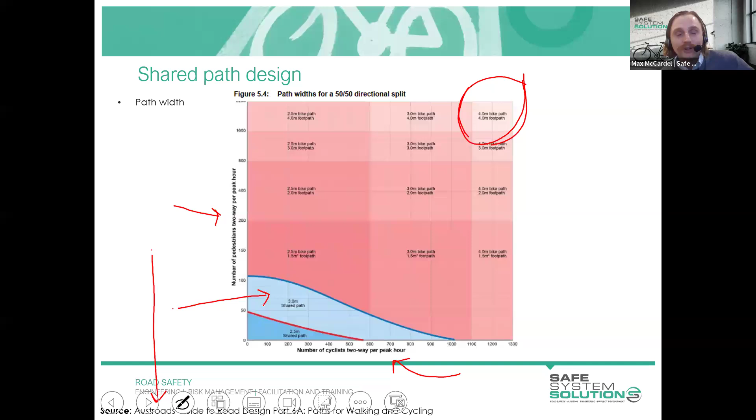Instead, let's aim for two separate facilities and go with that approach instead. You can see the really common 3-meter wide shared path — it's really only appropriate when you've got relatively low volumes of pedestrians per peak hour, so around 100 or so and less. But anything more than that, you get an uncomfortable environment and pedestrians may not feel safe, or it may not be comfortable to walk through there or ride through there.

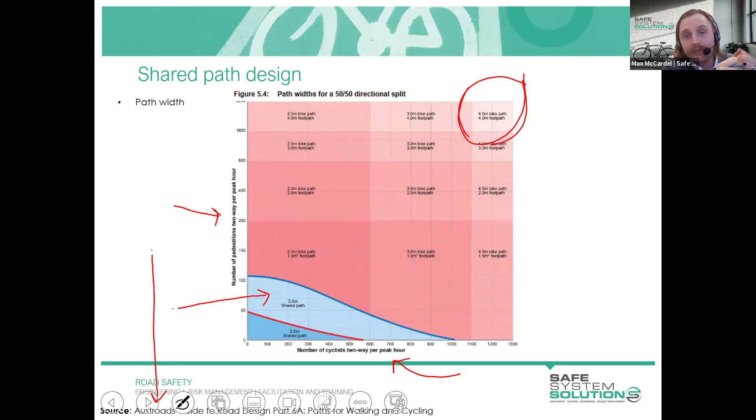Another way that we can gauge what width we should be adopting for a shared path. The previous one was based on if we know anticipated pedestrian and cyclist volumes, or we can forecast or estimate it. However, that data is usually very rare to have, particularly if you're working in a greenfield site. If it's a new development, you may be uncertain exactly how many pedestrians and bike riders would be using these facilities. You can do calculations and estimate those things, trying to plan for the future. But it's also quite common to refer to these tables, which split your shared paths into three types of classifications.

One is called a local access path, shown on the left-hand side here. The way I think of this, similar to all of these, is like your road use hierarchy. A local access path is similar to a local street. You're not expecting lots of pedestrians or bike riders. It's not going to be a high strategic function for bike riding through there, but it might connect to local residents and local streets. In these scenarios where you have that lower strategic function, you could look to adopt a desirable minimum width of around 2.5 meters. You can see a minimum width of 2 meters is nominated there, but with the caveat that it's a very narrow space. In this diagram, that's about 2 meters wide.

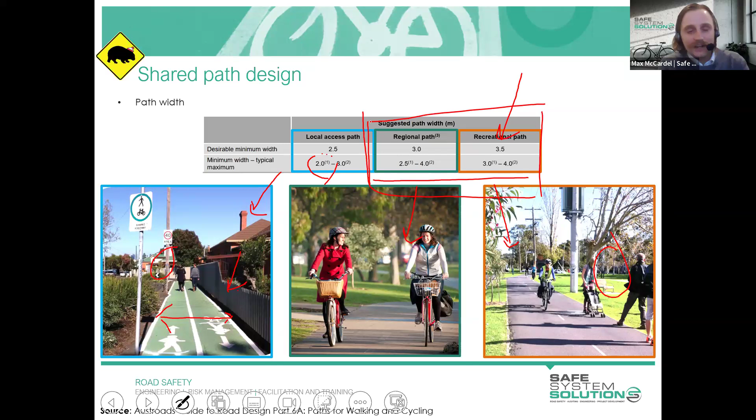The differentiating factor to the recreational path is there could also be adjacent land use associated with the path you're looking at - for instance, playgrounds, schools, or activity hubs adjacent to the actual path, where people may be more inclined to stop and spend more time there. So you'd have an even higher influx and there could be lots of crossing points. But generally, those two, regional and recreational path, are not incredibly well defined, and there's a bit of cloudiness around which you would apply depending on what your network looks like or what your aspiration is.

As a rule of thumb, though, that 3 meter wide shared path is a pretty common standard to have. 3.5 meters is for areas where you've got much more activity that is expected.

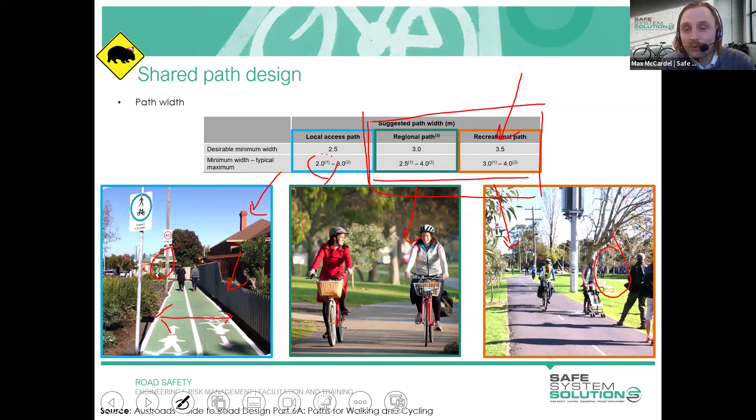Okay, I'll have a chat now about our gradients for shared paths. So gradient is just the slope of the shared path, how steep it is.

But anything more than that, what you're actually going to do is you're probably going to get riders not using that or looking for alternative routes, because it's unrealistic to expect them to be able to ride such a steep incline for so long. Of course, there's some riders out there that actively seek out these steep ascents, and they'd be very excited to see 10% or 15% gradients.

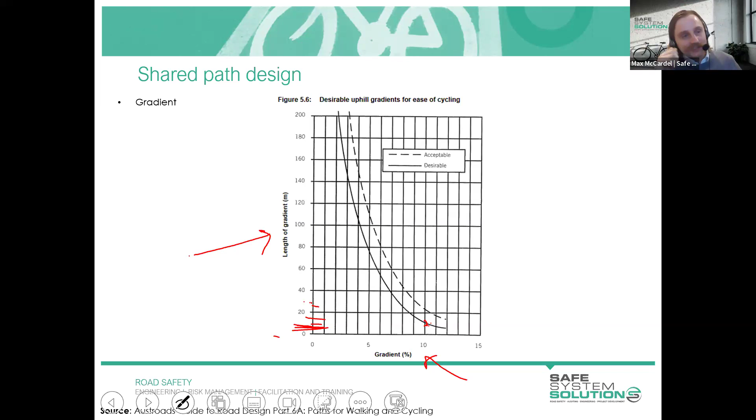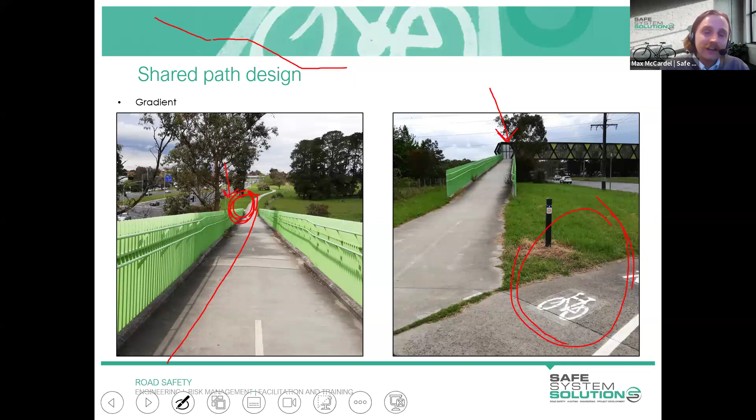So as part of this audit, there was a recommendation to move this path connection to where it is a bit more visible. It's not only more visible, but by the time you actually get to that point, you would have washed off a lot of speed because it starts to go back uphill again. That one has actually been installed since this audit was completed, which is pretty exciting.

But that's just an example of where you should be thinking about the uphill ramifications, how steep the hill or gradient of the path is, but also for users going down, what are the implications of potentially fast speeds going down your shared paths.

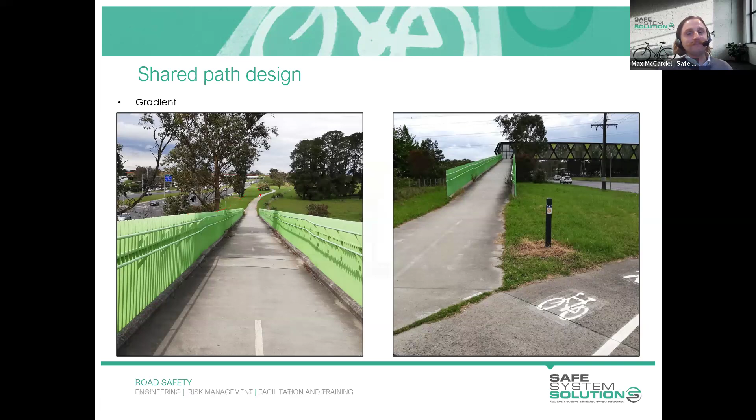For those not familiar with operating width, it's basically how much space we suggest for a typical bike rider. Now, we do have bike riders and cycling facilities with bicycles that are much bigger or wider. They could be lower to the ground, like recumbent bicycles, or tricycles with two wheels on the back that are much wider. So this is very much an average, and it's not going to say that every single bike will fit this.

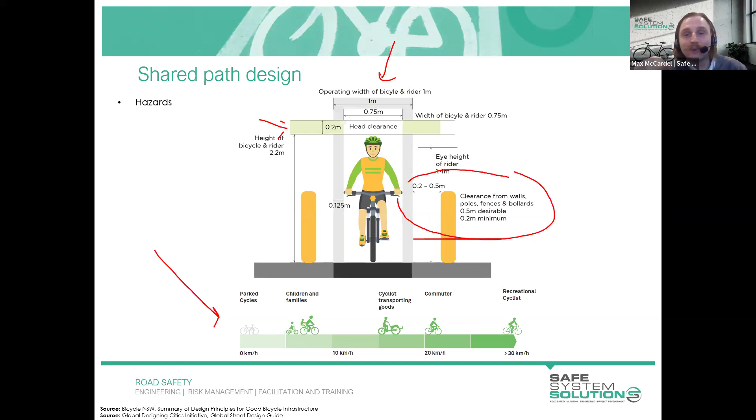I also wanted to note that this operating width of 1 meter is basically based on the idea of a nice flat passage. If you've got a shared path that's uphill, it's actually very common for riders to wobble their bike, moving the handlebars left and right to pick up or maintain speed. In those scenarios, if you've got an uphill shared path, it might be worth making it even wider to account for that kind of movement, rather than narrowing the space down too much.

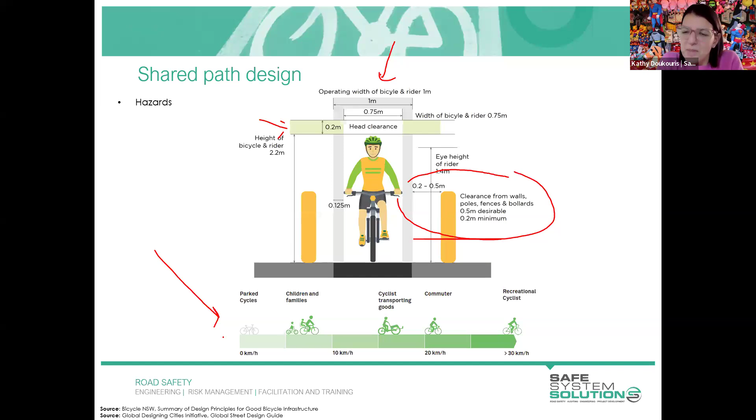Kathy: Thank you, Max, that's some very interesting information there. Oops, sorry about that. We've had a question come through based on the head clearance here: should the clearance under structures be 2.4 meters, and should this apply to developments as well?

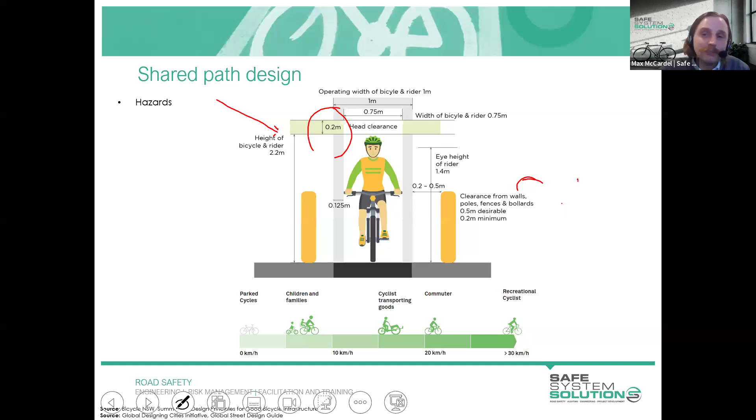So this one is out of Bicycle New South Wales, that's what they've currently got as their guideline. However, there are other jurisdictions that opt for a 0.5 meter head clearance instead, which would bring it to 2.7 meters. So it would depend on which jurisdiction you're dialing in from, but it would certainly be pertinent to reflect on your own supplements and standards about what that head clearance looks like. But yes, based on this one, you'd take 2.4.

And the rider height of 2.2 meters, what is that based on? Good question. So the eye height of the rider is where a lot of the calculation comes from. And that is once again assuming a standard or an average bike height, so where the saddle is, and then applying what would be an average height for a human being, and then kind of working it out from there. So it's by no means representative of the diversity of bike riders that we have. It is an average, but just like with any other operating widths that we have, so we've got operating widths for passenger vehicles, operating widths for heavy vehicles, their exact widths also differ, but we also just tend to adopt a standard or a notional kind of width or height in this instance.

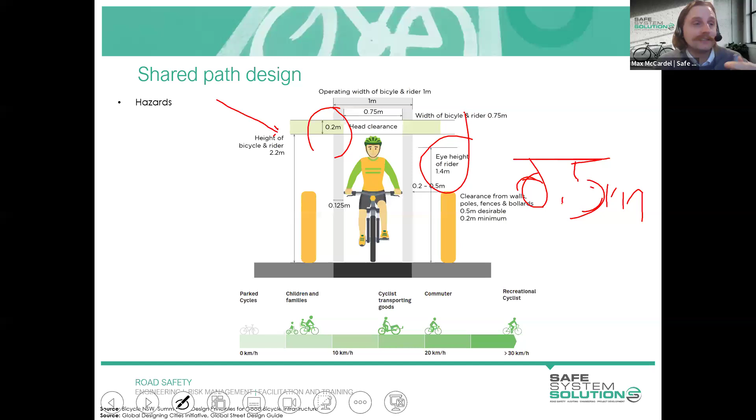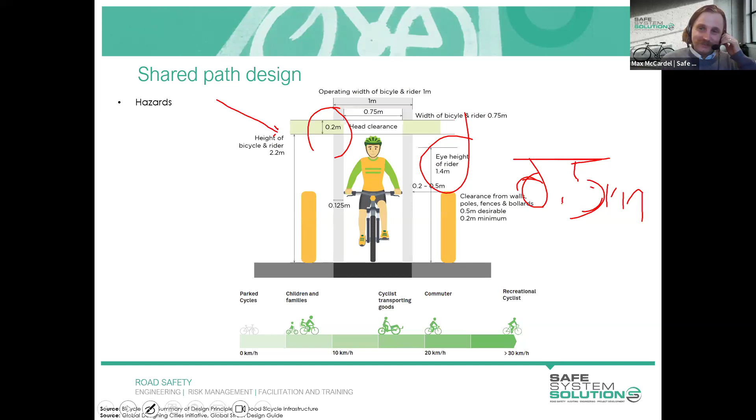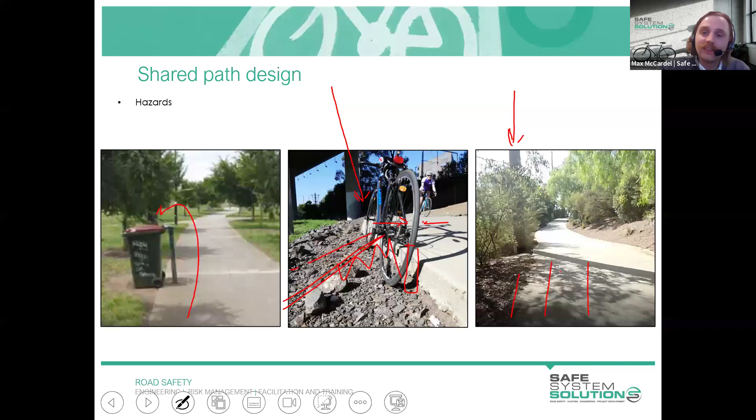Another common hazard that we do have is utility poles very, very close to the edge of the shared path. You might remember in the previous slide, I was talking about the rule of thumb, which is keep all hazards half a meter away from the operating width of the bike rider. When you get into these scenarios, it can be a bit subjective as to where the operating width of the bike rider in particular actually is. Like, is it over here? Or is it over there? How do you actually define that?

And the other rule of thumb that I'll give to you is you take the edge of the shared path as the edge of the operating width for your bike rider. Makes it a lot easier, because now if you've got any fixed hazard which is within half a meter of the edge of your shared path, you could classify that as a hazard and something that should be looked at to mitigate that risk.

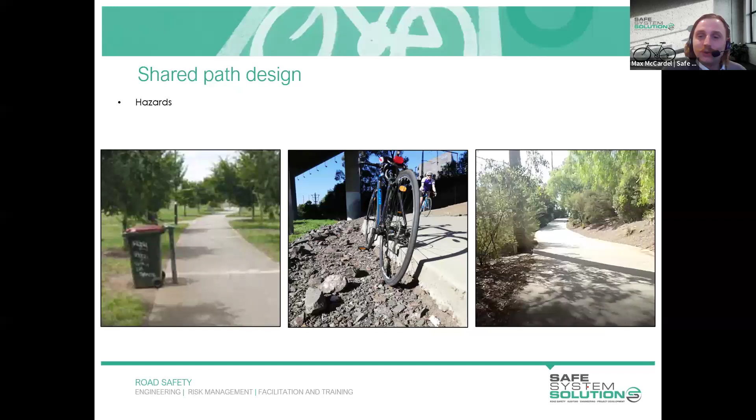Some potential solutions here. In a perfect world, you'd just absolutely remove the hazard altogether. You would hopefully relocate the pole so that it's outside of that half-meter clearance, or you would make an underground asset so you don't have a pole altogether, but appreciate you don't always have the luxury of that. Other things that you could do, you could shift the path out a bit and build it up on that side to maintain the width.

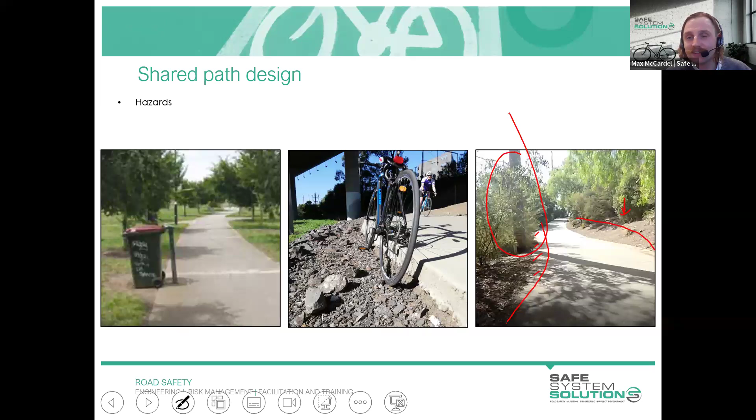Or if you're unable to maintain the width on that side, you could still narrow the path and use some pavement marking or something like that just to try and get riders away from the edge of the path there to reduce that as a risk. I think in this scenario, because you've got vegetation that blocks the sight to that hazard, and there's a bit of a curve there as well, all of those things increase the risk of riders clipping their handlebars on that. So even trimming the vegetation would help to reduce that as a risk.

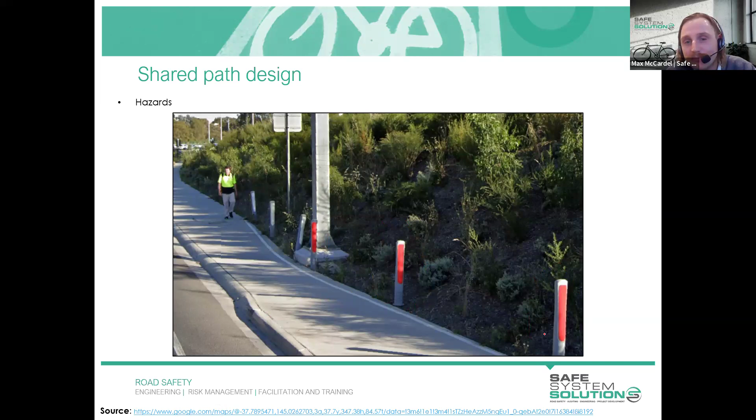Once again, it's that same idea where it's much, much better to remove the hazard altogether than try and highlight the hazard. But it's important to be pragmatic about these types of things. It is unfortunate that this was only constructed a few years ago, and this kind of detail wasn't picked up in a road safety audit or things like that. It certainly wouldn't have been impossible to have constructed this into the embankment and just construct some retaining walls to house that gantry system and then maintain the shared path width. So by all means, if you're doing things at a design stage, it's a lot easier to try and rectify those risks then through design solutions, as opposed to try and mitigate it through things like signs or lines or hazard markers, stuff like that.

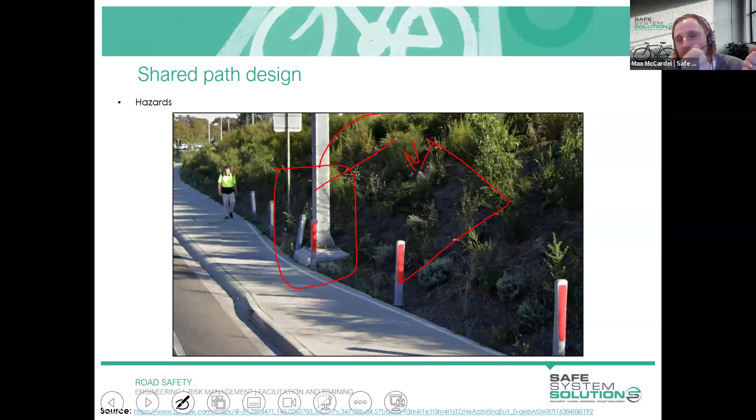All right, so wanted to have a quick chat about our sightline calculations, and appreciate not everyone here would be involved in completing these sightline checks. But I just wanted to make a note that there are sightline calculations specifically for bike riders. It's not a dissimilar equation to stopping sight distance or safe intersection sight distance. It's really not that different. There's just a few different ways that the coefficient is calculated and things like that, but generally very, very similar in principle.

So what we're looking at here is we've got sightline requirements for both the horizontal nature of a curve. So basically, if you were riding around a bend, can you see what's on the other side of that bend? Or is there going to be things blocking your vision? And to be able to calculate, well, what is the required stopping sight distance? That is, how far as a bike rider do I need to be able to see in order to, if there is a hazard on the shared path, stop before colliding with that hazard. So we need to have a think about, well, what's the likely speed that's going through there? What's the friction coefficient? It will depend obviously on the pavement conditions, so if you're on a gravel track, that would differ to if you're on a nice concrete path. It'll also make a difference what direction of travel you are if there is a grade, so if you're going downhill or uphill, that will make a difference as well.

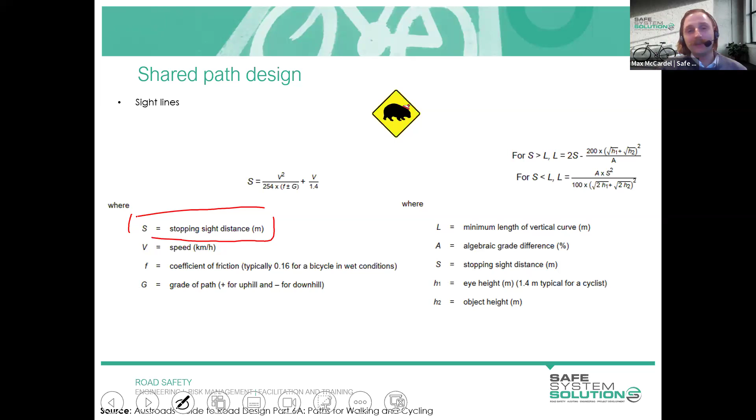The other time that we will do a sightline check will be for vertical geometry, so that's where you've got like a crest in the shared path. And it's a similar idea where we want to make sure that we've got enough sight over that crest so that if there is a hazard on the shared path, I'm not going to just ride straight into it and have no idea. I've got the ability to stop. So that's where that second equation comes in.

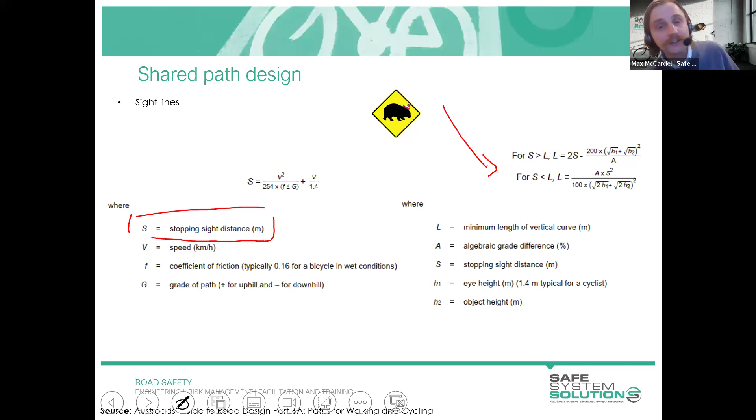The good news is neither of these kind of quite technical calculations will feature in your quiz, so you don't need to get too hung up if it's been a while since you've done any calculations, but just wanted to make a reference for those that are involved in technical design that there are specific calculations for cycling sightlines.

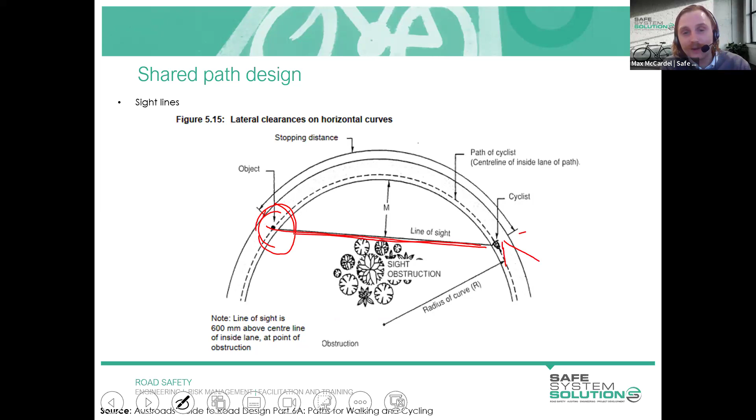So that's what the calculation is used for. Thought I'd give you an example of one of these, where I've actually used this equation. So this is another audit that I completed of a shared path.

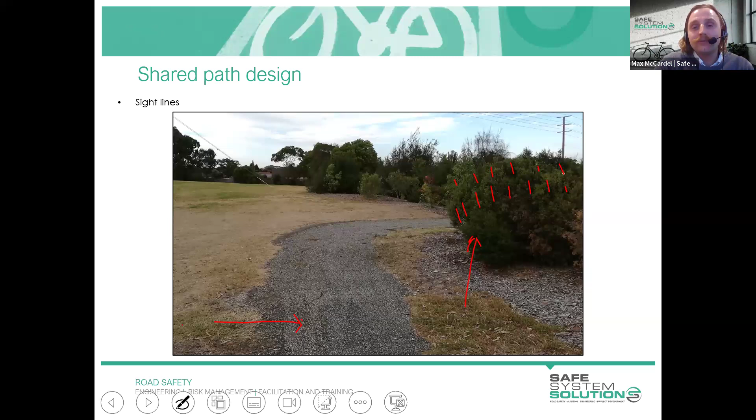Of course, if you were doing something during a design review, you'd be saying, is there a type of plant we can install here that is by nature low growing? So it's not going to get that big and we don't need to worry about that maintenance.

So just an example of how that is actually applied in the real world.

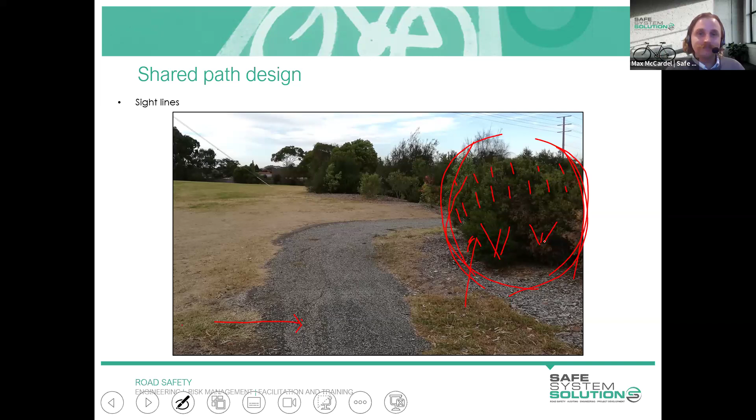I'll move on now to fencing, because there's generally a bit of apprehension around applying fences for shared paths, or a struggle to understand exactly when and where not to install fences. Because if they're installed too close to a shared path and they're not adequately protected, they are a hazard. So it's important to get these things right. And the Austroads Guide does have some pretty good guidance on when we should be installing these things.

I'll do a shout out to Queensland as well, TMR. They have got a quite detailed report or guidelines document that goes into much more detail than this about what type of fence is required and what the fence should look like. So if you're working in Queensland, good news for you - you can definitely reference that.

But this is certainly what most of us would be looking at. So what we're looking at is there's two scenarios where we could be providing a fence. In the left-hand example, we've got a vertical drop, where there's just a sheer face at the edge of the path. Or we might be putting a fence where we've got a steep embankment.

I'll focus on the left-hand side first and chat through the vertical drop. The first note is a fence is not required where X, and X is the distance from the edge of the shared path to where the drop is. If X is less than 2 and Y is less than 250 mil, we're saying a fence is not required, with the caveat that we should be battering off the surface.

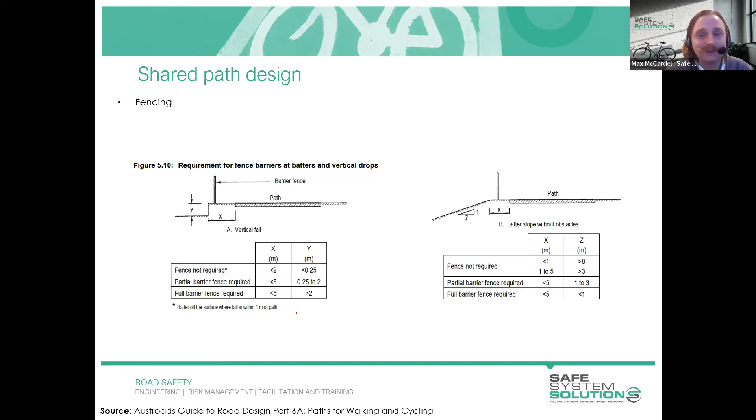So that's the first description there. Then we get into these two tiers of fencing, and I kind of wonder if this was the best approach because it overcomplicates the fencing process. But anyway, I'll chat you through it so you can understand it, and I'll let you make up your own mind as to if this is the best way to go about things.

There's this idea of a partial barrier fence, which you could call the silver standard, and then a full barrier fence, which is the gold standard. It's saying if you've got a drop off that's between 250 mil and 2 meters - and a 2 meter drop off is massive - then partial barrier fence, let's pop that one in. And if it's greater than 2 meters, you should be doing a full barrier fence.

I'll show you exactly what those two different fence types look like in a moment. But it's just got those clear definitions of when you would do either a partial or a full.

It's a similar approach for our embankment. We don't require a fence where we've got quite flat embankments. That is kind of self-explanatory - fence not required. And the way that you read it is it's the relationship of 1 to Z, or rise over run, 1 to Z.

And if it's between 1 to 5 away, like hinge points, and Z is greater than 3, it's relatively flat, then we don't need a fence. But if it's less than 1, then it has to be even flatter than 8.

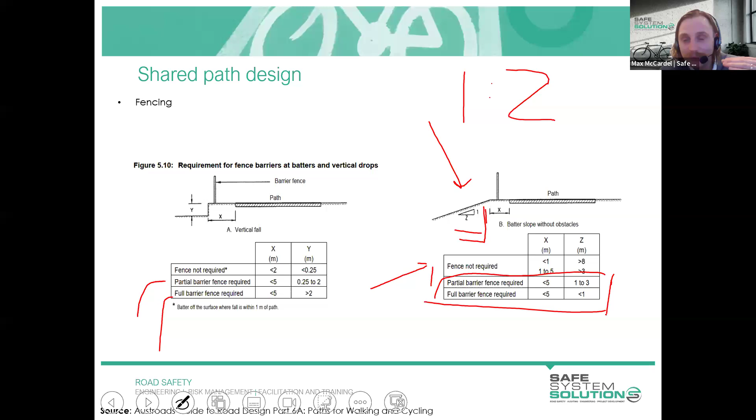Don't get too caught up if that's a bit too technical, but it's just that idea of basically what does that slope look like? Is it like a 45-degree or is it like a 10%? You can then do a similar kind of calculation to determine, well, I know what my 1 to Z is. I know what type of embankment we've got or will be constructing. And I know that I'm going to have to install a partial barrier fence or a full barrier fence. So very similar, you just got to work out which kind of tier it fits into.

Teaching this course a few months ago, I learned of a participant who said their toddler fell through the gaps of one of these things while riding through the partial barrier fence. So I would tend to be more conservative and look at designs that advocate for full barrier fences, because it's not a negligible cost difference, but there's not a lot of cost saving or benefit in always going for a partial, where you still have a risk of those lower to the ground, smaller people, or hazards falling through. Anyway, just wanted to share that.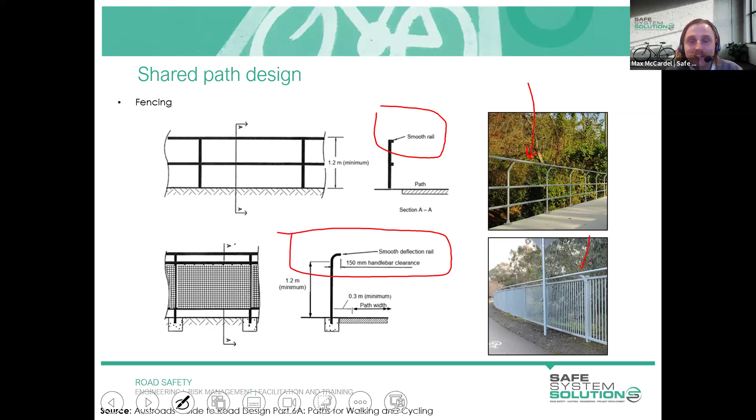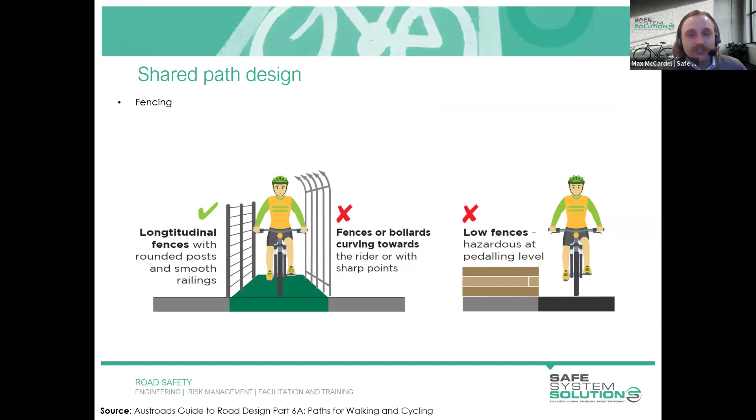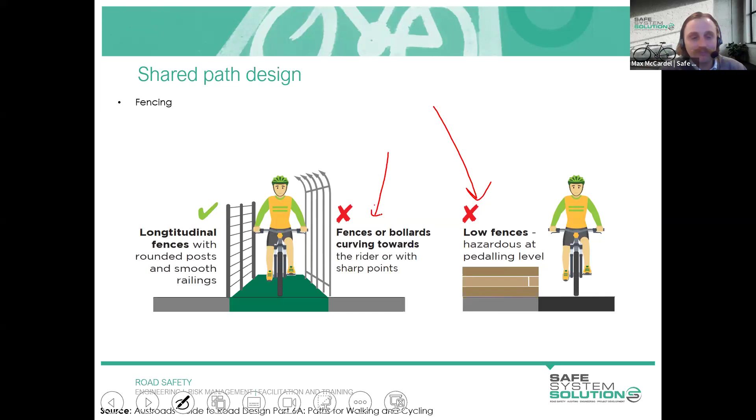Another thing just on the fencing I wanted to mention, low fences. So if you've got planter boxes or anything like that, they can also count as a risk, particularly for pedaling strikes. Anything above 200 mil is where you might encounter that pedaling strike. So have a think about if you've got any scenarios like that. We also want to make sure that whatever fence we're using doesn't curve towards or have any sharp points or vertical members that could potentially snag the bicycle rider.

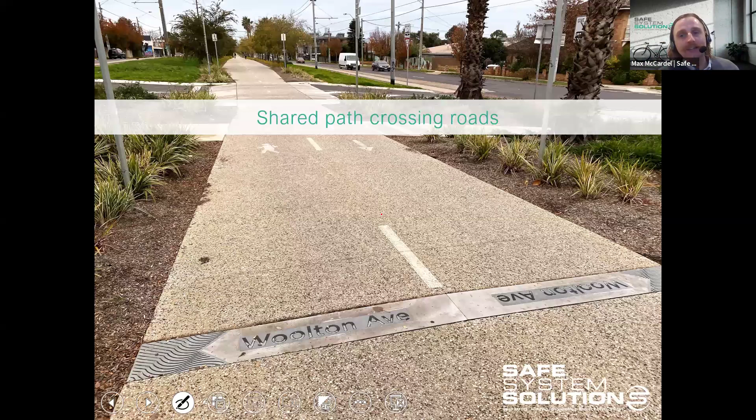All right, I've got a shared path crossing over a road here, but I actually wanted to ask everyone a question. Kathy, if you don't mind opening up a second poll for today. The question I've got for the group is, do you reckon we should be installing fencing along this shared path? So I'll draw a little diagram of what I mean. Let's say we wanted to put some fencing here. Have a go at that. Remember, you're not marked on this, so there's no pressure. But based on what we've gone through, do you reckon you'd be advocating for a fence along this path?

Interesting question, Max. Do you know this location, Kathy? I do, this might have even been one of my photos. Yeah, this is near your high school, this is your stomping ground. It is my old stomping ground.

It's a very interesting one, I guess, if there's any Melburnians in the show today, because recently they've added stop signs here. Haven't they always been stop? It wasn't always a stop, it was a give way. Is that one there? Yeah, that is a stop. Sorry, I'm talking about back in the day. Oh sorry, yeah, nice. But anyway, it's not part of your question.

And sorry, remind me Kathy, are we doing prizes as well? We're giving out prizes, great minds think alike Max, I was just about to ask you the same question. Surely we've got to give away a prize for a good answer here. I think we're due. We are. I think we're probably behind, so we better make up for lost time. And that does explain why you're in such a fun carnival-themed background. I'm at the circus. You're at the circus. Yeah, I thought that was The Office. It is The Office, it's a circus sometimes. I'm the clown.

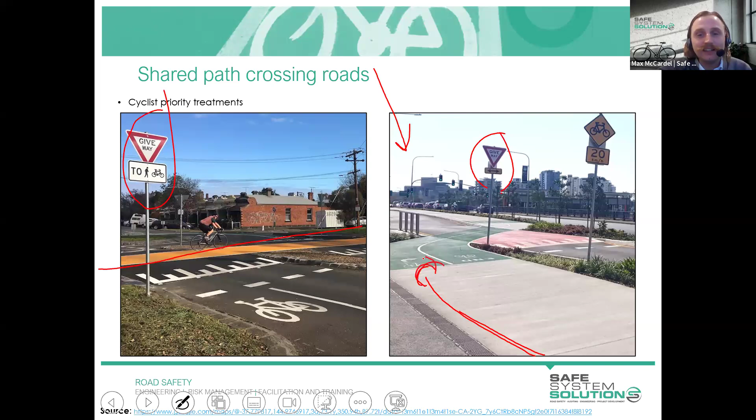Let's put ourselves in the perspective of a bike rider, and you want to maintain momentum. That's kind of a given. It's very difficult to get to this point and then kind of turn back on yourself to see if there's any vehicles there. Now, of course, you do have the right of way legally and you are awarded the priority, but it's very good practice to make eye contact and ensure there's no vehicles traveling through there, ignoring all of those signs. The way this is set up with that angle crossing makes it very difficult to make that eye contact. That angled crossing is just not set up in a way that allows it. Whereas in this example, we've got the crossing points and the vehicle traffic basically at perpendicular angles. The closer you can get to perpendicular, the more you maximize your sight lines. So very well articulated there, and we'll give a prize out there, Kathy.

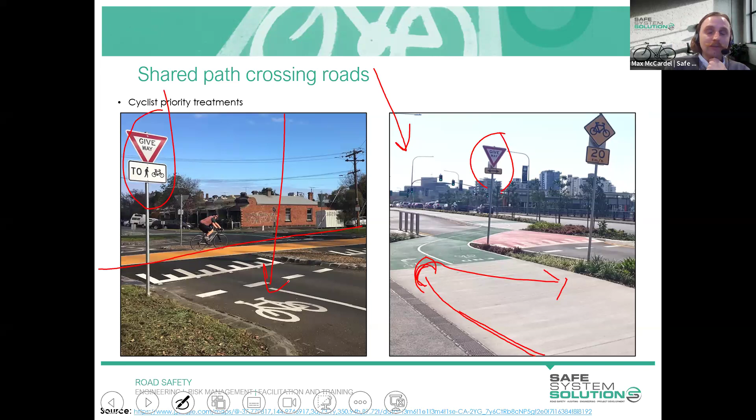Now, this is what it actually looks like a little bit closer, and you can see lots of tire marks, lots of skid marks, perhaps indicative of bike riders having to slam on the brakes because there is a vehicle that is not giving way to them. So they have to quickly avoid a collision, or just like the curve itself is too tight and they've had to quickly throw on the anchors. But you can see that this kind of setup doesn't really facilitate those perfect sight lines between bike riders and vehicles there. It also makes it difficult for vehicles because they may not expect bike riders to be crossing over them at an angle, kind of diagonally. It's just a bit unusual to do that.

I'm certainly not trying to detract from this project. So anyone up in Brisbane that perhaps worked on this or is familiar with this site, I just wanted to acknowledge that I understand the site conditions and constraints you're working with, and appreciate that this was probably the best solution that could have been arranged, but it kind of does indicate why perpendicular crossings tend to be more favorable.

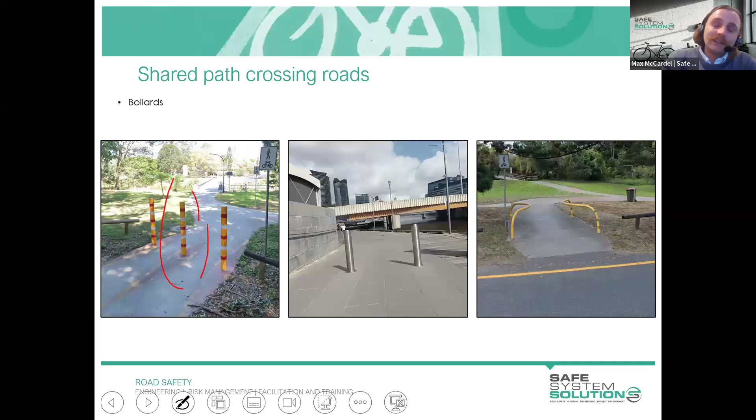If we are installing bollards, there are a few principles I like to take away. The first is reflecting on the environment. The middle one we're looking at here is: do we actually need to have bollards here at all?

The reason these have been installed is that this is already a pedestrian precinct, and there's a shared path in this vicinity that continues along this boardwalk. But the reason they've been installed is for maintenance vehicles, so that they don't go any further.

So that they don't cross over the bridge or anything like that. It's not for general vehicles, it's not for motorbikes accessing the boardwalk or whatever. It's just so those picking up rubbish don't go through there, or whatever it is.

I'm not sure that the bollard is the solution there. You could certainly try to administrate those kinds of risks out through safe working methods, just ensuring that this is the line of your work and you can't travel any further.

You could also geofence vehicles, so that if they're working in this area, they cannot travel any further than that line. I'm not sure putting up the bollard is the right approach there.

I also think it's very important to make note of architecturally designed bollards. Often they're used with the intent to camouflage with the surrounding environment.

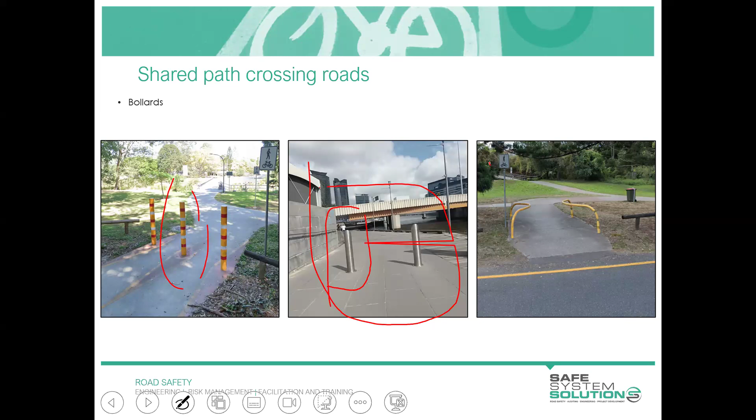There's a comment that's come through as well, Max, about the camouflaged bollards. Yeah, absolutely, so that's definitely one to avoid there.

The one on the right here, these are called banana bars. They're up in Queensland as well. They're just like a squeeze point, but they're no longer employed, no longer installed.

In fact, they're ripping them out and replacing them because they create this awkward squeeze point where you kind of meet each other in the middle, and then you end up having handlebars kissing instead. So a bit of a uniquely Australian treatment there, but unfortunately not a very viable one.

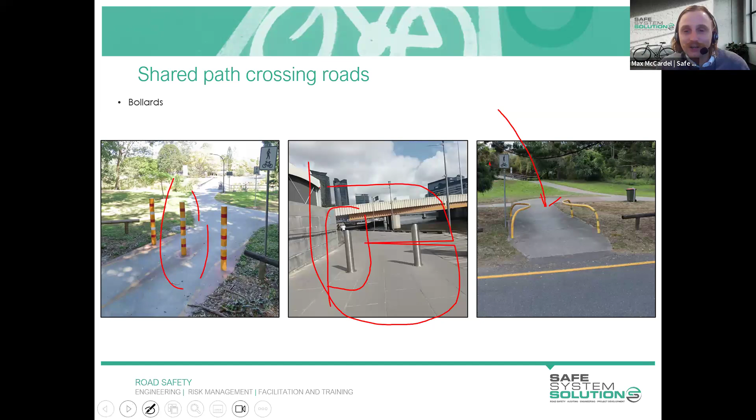Some other bollard treatments that we look at include timber bollards or chicane-style treatments. A chicane is like that kind of path deviation.

Chicanes can work quite well, they're certainly going to deter vehicle entry. A motorbike could still get through there, or a monkey bike or whatever. But you do need to be mindful of the entry width if you're designing a chicane treatment.

Because if you've got cargo bikes, they're quite long, and if it's too narrow a gap, you can actually physically get cargo bikes stuck in that space, and then they can't access the shared path at all.

So this one's a relatively wide one, but if you make it too narrow, then you do have the risk of larger style bicycles getting stuck there.

Another arrangement that has been employed is the use of U-bollards. This one's actually in Hobart, riding down here and then entering the city centre, it's actually entering kind of a car park vicinity.

You've got this bollard hazard directly in your travel path. The idea is to raise your awareness, to let you know that you're exiting your shared path and entering more of a roadway type of environment.

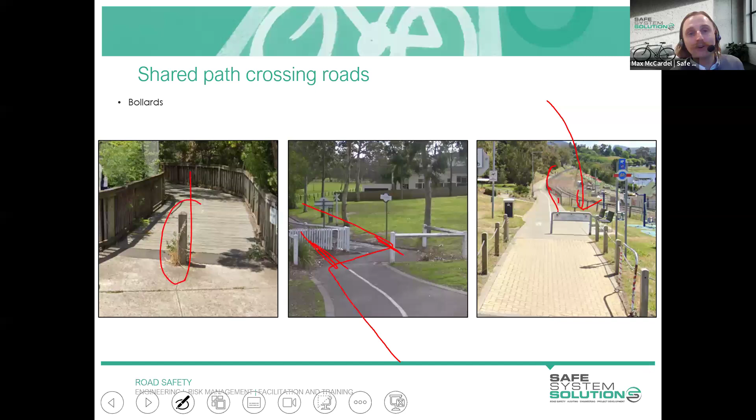And I think we should be similarly wary of just implementing bollards whenever we've got shared paths that cross over a road or are adjacent to a road network.

Just a quick question, Max. The banana bollards, are they used to ensure that only one cyclist approaches the junction at a time?

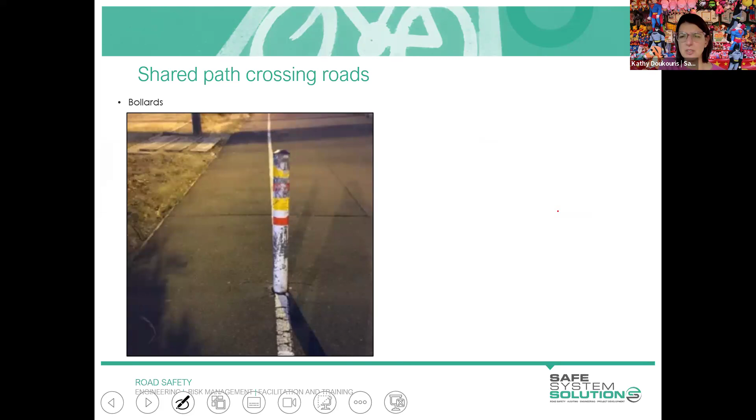To be honest, I don't know the history of the banana bollards. I just know that they're getting ripped out because they weren't achieving the desired result. But anyone up in Gold Coast or Brisbane that might have a bit more history on them, maybe they would know about that one.

I think it's just an alternative to putting the vertical solid fixed object like this. Just went for a different design approach, but it hasn't quite managed to reduce the risk of collisions.

Thank you. Just wanted to share this before I stop talking about bollards. So this is actually a bollard that you can see has been struck many, many times. It's around the corner from our office, on the Upfield Bike Path shared path. It's a super popular bike route with lots of cycling traffic and people walking as well.

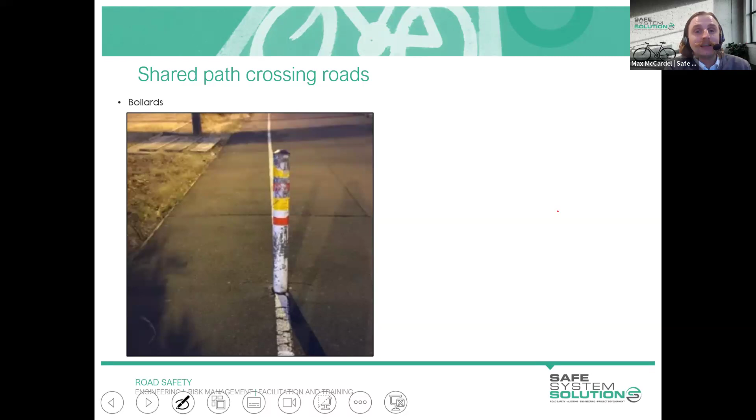And we had this fellow a few years ago. His name's Andrew. He rode straight into this, and then council the next day came out and gave the bollard a bit of a spray paint and put some new tape on it just to freshen things up, make it a bit clearer.

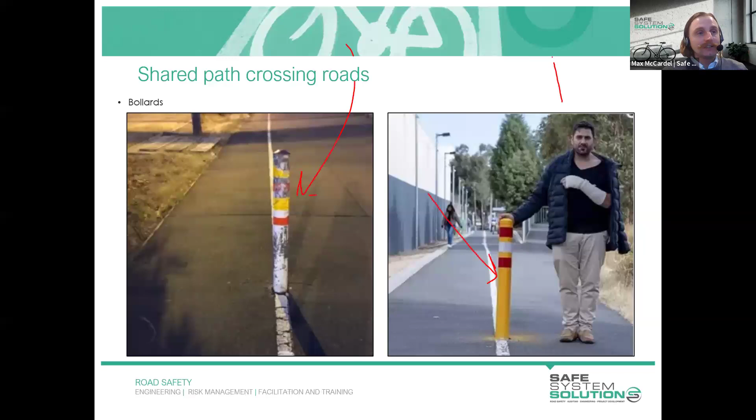However, Andrew did suffer injuries when he collided with that bollard. He had some facial reconstruction as well as broken bones in his wrist. And whilst he was on the ground waiting for an ambulance to come and pick him up after this collision occurred, he witnessed two other bike riders hit that same bollard.

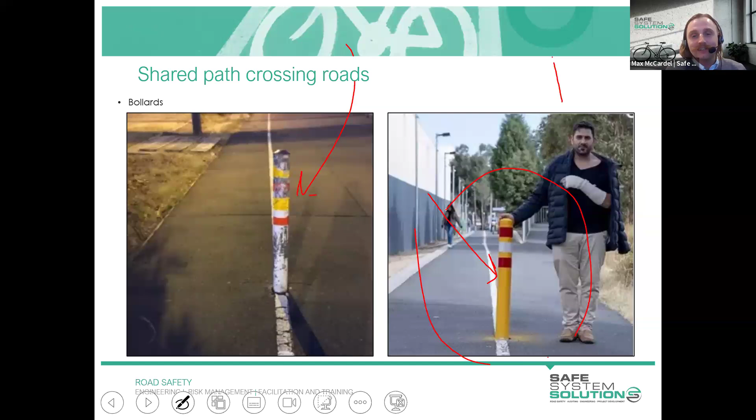So we've got a record in our database of Andrew's collision because he went to hospital and there was a report made. But the other bike riders that collided with the same bollard, we do not have a record of. So it's just another example of bollards being frequently hit and underreported. We should be wary of just installing them and assuming they're always going to be seen, because they can result in injuries that we may not know about as well.

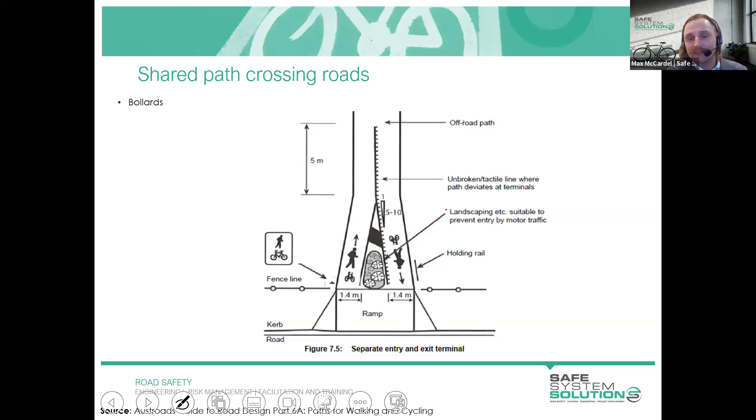So the Austroads Guide does provide an alternative to what we could look at instead of bollards. So chicane treatments is one example. The other is something that looks like this - basically like a splitter island, where you're demarcating two directions of travel for your shared path, creating a central island. You could be using landscaping there to prevent motor vehicle entry.

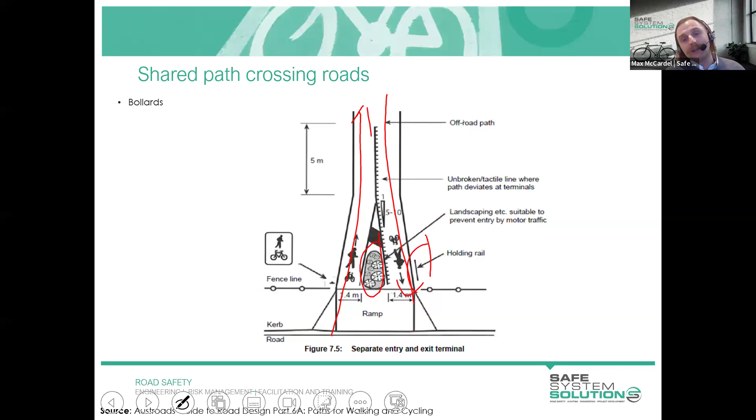And you can also include things like holding rails just to make it a little bit easier for bike riders to sit and prop and wait for a gap in traffic before crossing over.

This is not the exact general arrangement shown in that figure, but it's a similar vein where we've used bollards in the middle of that splitter island, and the splitter island is just grass, not like an actual raised median. The idea behind that is to hopefully deter vehicles from entering the adjacent bridge. Of course, if you were a vehicle, you could just go around it if you really wanted to, but it's hopefully going to deter that movement, whilst also not just putting bollards in the middle of shared paths. So that's an example of how that risk could potentially be mitigated using bollards, but in a bit of a sensible way.

The other reason I like to show this example is it's a bit difficult to see, but those bollards are actually solar panels. On the top they've got a solar panel, and at nighttime they light up. So it's not just during the day - at low light conditions they've got their own light source and are able to be seen quite easily.

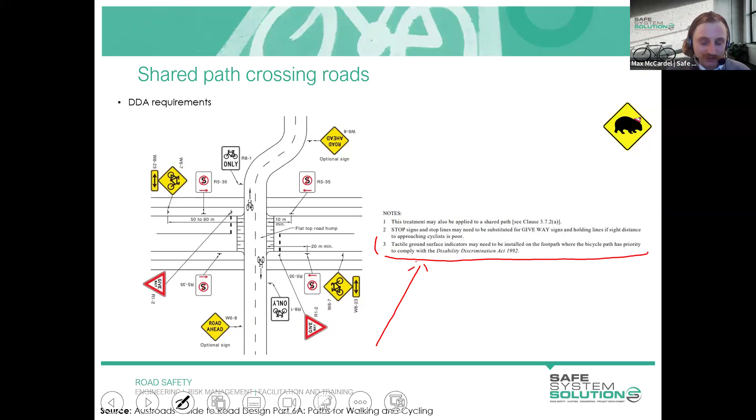I just wanted to touch on the DDA requirements as I mentioned at the start of today. If we are looking at doing raised crossings, or any shared paths that are crossing over a road, it's important that we acknowledge that shared paths are for people that may have disabilities. So people with visual impairments or those that are blind - we still need to be complying with the Disability Discrimination Act. Things like TGSIs may need to be installed, depending on who's got the priority. So we need to be thinking about all the users there, and ensuring we've got those features for those with disabilities.

All right, so shared paths, crossing over shared paths now. So here you can see I've got two different shared paths, and the question I've got for the group is, what do you think is wrong with this photo? I've got a very confused looking bike rider there. My question to the group - you can chuck it in the chat - is why do you think she's confused? What do you think's wrong with this photo? I'll get her out of the way so you can have a good look.

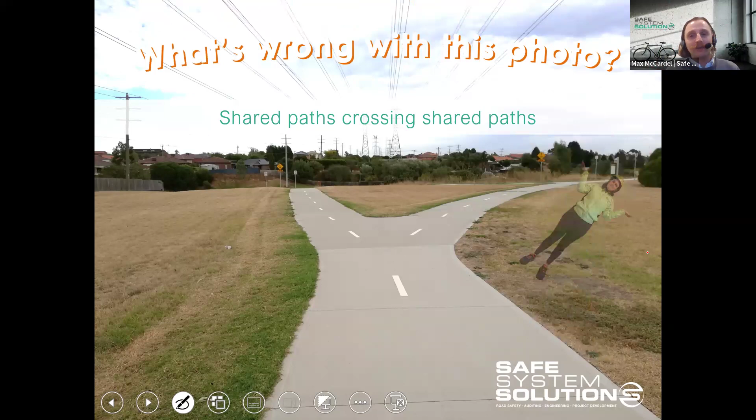I'll give you 20 seconds to have a go at that one.

This is a classic, well, not really a classic, but a Y intersection. You don't see too many Y intersections on the road, for good reason. There is a good reason for it.

Are we giving away a prize, Max? I think we should, I think we should. Okay, so we've got ambiguous as to who gives way to who. Confused on priority, unclear about who has priority. She's showing the Y shape. Unclear priority, both legs appear to end up at the same location. Direction is confusing, no wayfinding signs. Very good, very good, all correct as well. A very switched on group. I like this, I like this energy.

So absolutely, it is very confusing and very ambiguous, and you certainly want to avoid those issues when designing shared paths, particularly when crossing over other shared paths. So just to give some context on how we could fix this to make it clearer who's got priority, a better approach would be to assign a thoroughfare or a dominant leg. Let's just say this is what we are assuming is the major thoroughfare.

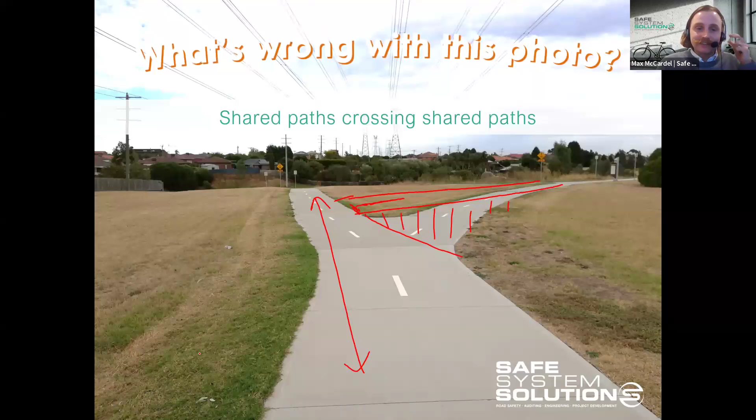And don't be shy to be implementing give way signs and holding lines and things like that. But the other point, and I will give out a prize here, Kathy, for the person that mentioned wayfinding, because this is a real life scenario where I was not familiar with this location at all and had no idea where to go. I had to get off my bike and get on my phone and check my GPS. Luckily I had my phone, because I didn't know which path was for me.

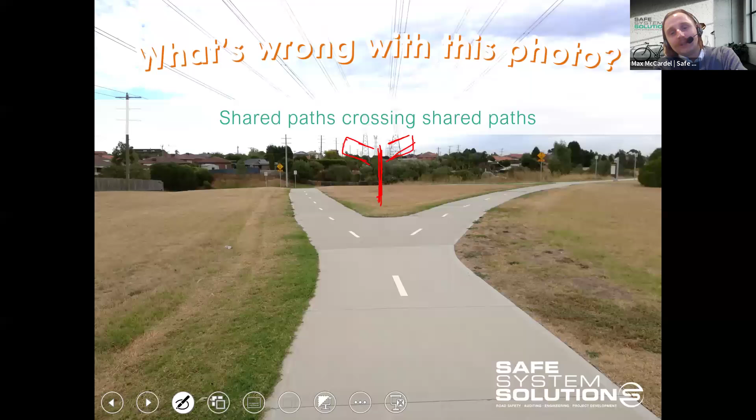So having some simple wayfinding there, which says this is the direction to the shopping center, and this is the direction to the river, it makes for such a more connected and attractive route. It's not necessarily a massive safety concern, but it will certainly improve the overall amenity that you can provide for shared paths.

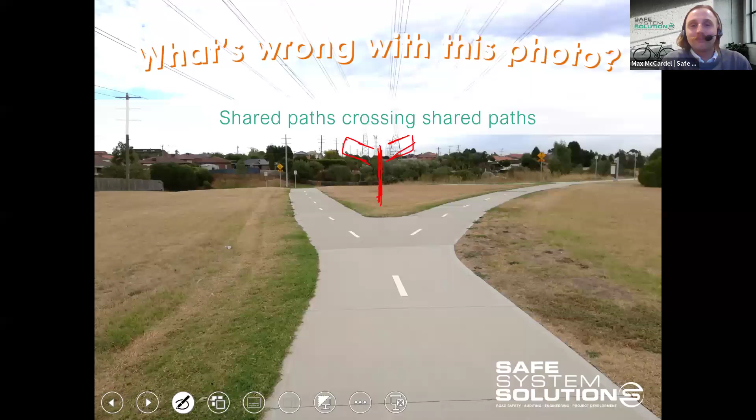So Austroads recognized this several years ago, that within Australia and New Zealand we've got a bit of a hodgepodge view on how to provide wayfinding. So perhaps we need to be doing things in a more harmonized approach. Austroads actually released a research report diving into what different jurisdictions do for bicycle wayfinding and what are the most important things to take away if you are designing for wayfinding.

I don't think any of it is revolutionary, nothing's going to be too complex to understand, but it is one of those areas that's commonly overlooked. So it's important, if you are designing shared paths, to make it clear where a bike rider is going to be going, what destinations they're looking at, how far it is to those destinations, using consistent colors, consistent fonts, and the way things look and feel. I think it's very, very important.

There's one example I can think of, a creek that I used to live near that regularly floods, and there's wayfinding before you get to the low point of the shared path to let you know that if the creek is flooded, you should turn around now and instead take this route, because that's the high ground and you'll be okay. But if you keep going, you're gonna get your feet wet. So I think that's another good example of wayfinding signage, thinking of those instances where the shared path may not be available and what the detour looks like.

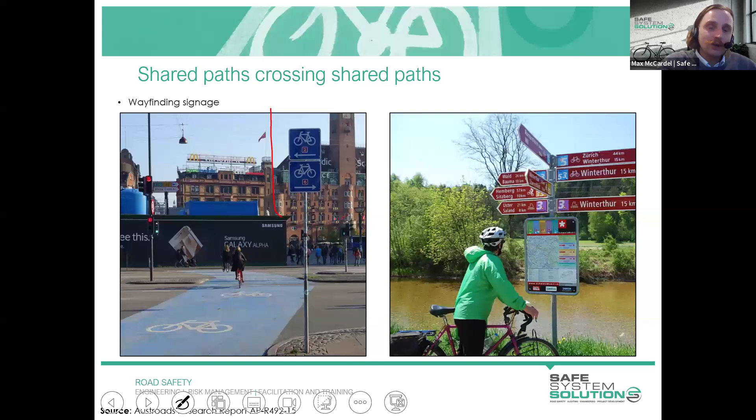As I said, it's nothing too revolutionary. So an example here out of Copenhagen: the way they do things is they have numbers for all their bicycle routes. If you're on bicycle route number 2, you know you're going from the train station to the CBD. You don't have to read a word of Danish, you just follow number 2. So I very, very strongly recommend using numbers.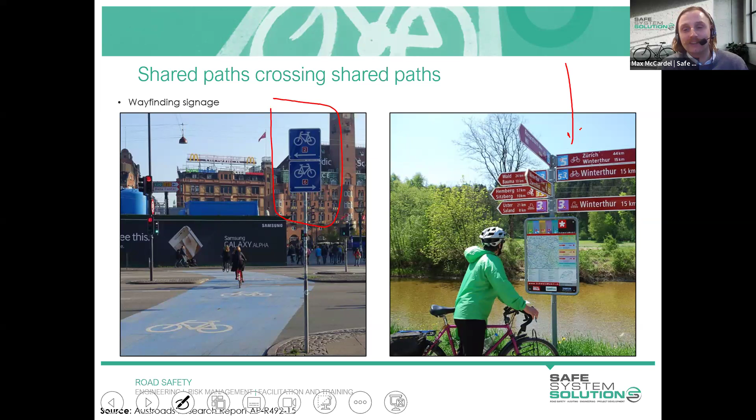The right photo is taken out of Switzerland. They also use a numbers system, but they've also included some additional distances and attractions, and provided a map at key locations as well, so you can see where you are in the scheme of things.

Where we do have shared paths crossing over other shared paths or crossing over pedestrian areas, it's important that we think about how we can manage our bike rider speeds, because we may not want them to be able to maintain speed where we've got those conflict points. So in a very similar principle to what we did with our vehicle traffic at conflict points, we wanted to make it clear who's got the priority, and we wanted to reduce speeds in that environment so that the conflict point is well understood and there's a greater compliance with accepting that priority.

So I've got this example, which is quite unique. It is City West Station in Perth, and the train station is just up there. This is one of those pedestrian boom gates, whatever it is. So when the train's going through there, obviously those are all closed up, and you just get this crowd of pedestrians waiting on the other side. As soon as they open up, they're able to cross en masse and they just head up here, and this is a shared path. So they go right up there, with this huge influx of pedestrians all at once.

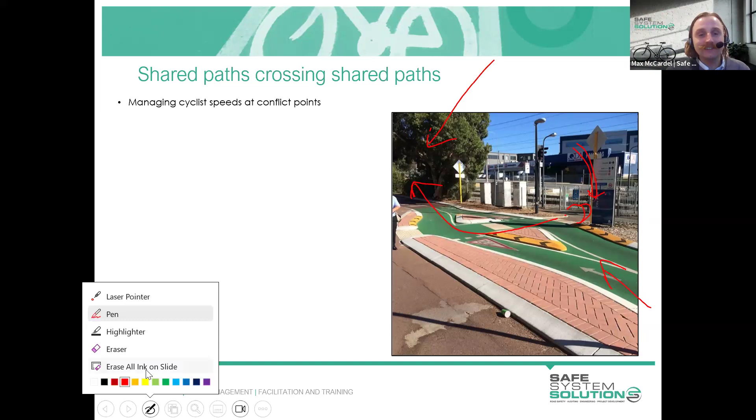Now, what they've done here is rather than riders just travel along like it's just another shared path, they've deliberately made some quite unique changes to it, and it's very much linked to how we would manage vehicle speeds. It's very much based on traffic engineering principles. So they've got a splitter island. A splitter island is like, hey, something's changing. You're approaching an intersection, or your environment's getting narrowed.

They have used a contrasting color for the shared path, so they've used green. They've opted for a pavement marking of give way there as well. There's some additional curb outstands or blisters, whatever you'd like to call them, that's been installed. And there's all these different kinds of visual stimulus to say you're no longer just riding on a normal shared path. There's something a bit unique about this location, which I think is quite a sensible way to approach it. I'm not a big fan of just using signs and lines and that's it.

You can't just say, pedestrians ahead, and then expect to see bike riders' behaviors change. I don't think that's a very good approach. Instead, implementing infrastructure and changing the way the shared path feels, I think is a more suitable way to do that. But another way that you could potentially manage this conflict point...

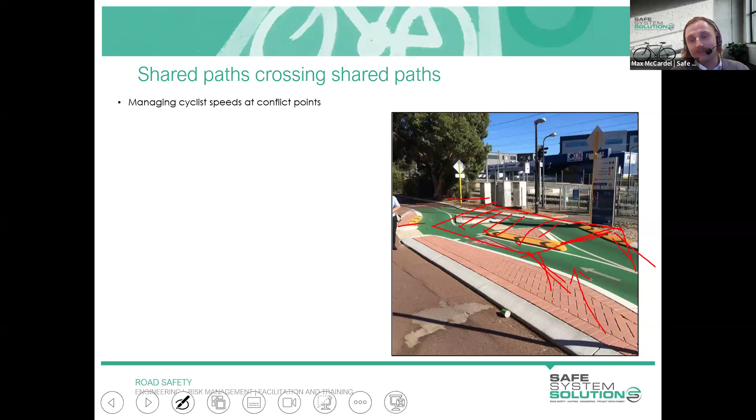...is through the use of, I guess, a wombat crossing. I'm going to have to exaggerate this - it's quite a steep gradient there, but it probably wouldn't look like that. But basically creating like a zebra crossing over this section here. And riders, as they approach this, they have a ramp grade. So once again, just making it easier to delineate that space, raise the awareness of the crossing point altogether, and trying to highlight that this is a conflict point.

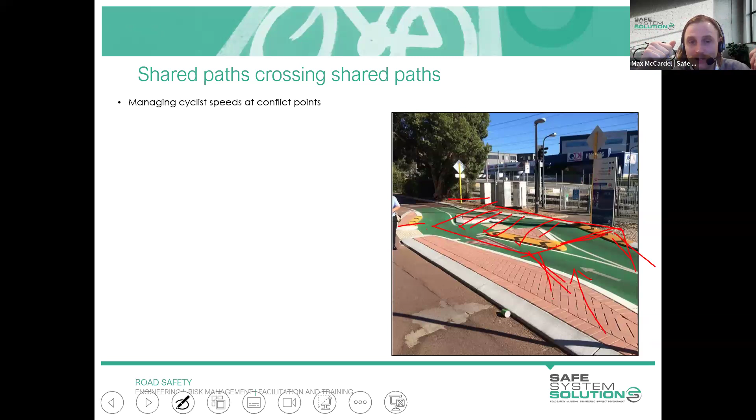I tend to prefer the wombat crossings or the zebra crossings because whenever we see those crossing markings, it's relatively well understood. People see those and they know, okay, this is pedestrian priority. I need to give way. I need to slow down. So I think that they're a good thing to be implementing, even across shared paths or across bike paths, because they are readily understood.

The other example that I touched on briefly is using signs or lines or pavement markings. So this idea of putting a stencil down and saying, slow down, there's pedestrians crossing here. I've seen them used in multiple jurisdictions and I've never seen them being evaluated for their effectiveness. So I suppose this is just subjective, my own opinion, but I don't think that they would offer significant benefit in actually slowing down bike riders, because by the time you read that, you're likely already at the conflict point and you could be traveling at speed, so you might not read it altogether. It's one of those things that it may show that you're doing your best to try and reduce that conflict, but I'm not sure it's really going to significantly impact or influence the likelihood of collisions occurring.

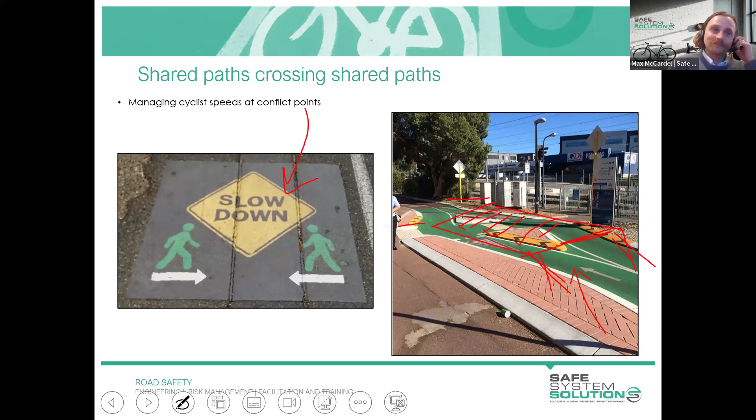Alrighty, before we move on to the LMS and chat through the rest of the session, just wanted to finally close out on how we actually end our shared paths. Just putting up a shared path end sign is obviously not an ideal way to go about things.

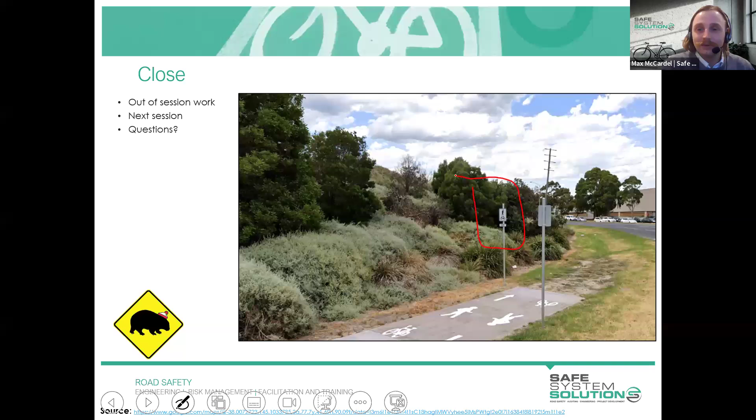Really important that we are connecting destinations, providing that strategic function of shared paths. We are moving bike riders to areas of interest and connecting those key hubs. We're not just putting up a sign saying this is where your journey ends and you don't need to go any further, because that's not how the real world works. You will get both people walking and people riding who would just use the verge and potentially access the carriageway to continue their journey, which is likely not what you want to achieve.

So just wanted to shout out that you should think about the strategic function of your shared paths as well, and have a think about how you're going to be ending those facilities.

Thank you, Max, and thanks everyone for your questions. We've got a comment that's come through about another way to slow people down: what about small speed humps or rumble strips for cyclists?

Great question, I'm in favor of those treatments. What I'll do is in our next session include some slides as examples of those, so you can get a bit of a picture of how that can look. I think that is a good approach. Invariably there are areas where we want to slow down bike riders because of pedestrian activity, and if you can use vertical deflection speed humps, it doesn't have to be a significant, massive destabilizing type of hump, but something that would slow down a bike rider makes sense.

Similarly, rumble strips, particularly if they've got a little bit of different texture to them, or they've been installed slightly proud of the adjacent surface, if you're riding across that you might get a little warning in your handlebars. I think that's another sensible solution to reduce that risk of just traveling through there quickly.

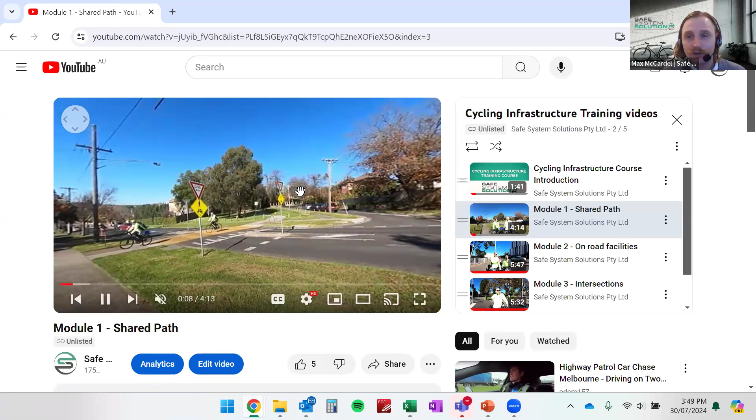The YouTube video is a 360-degree video. If you've never used this before, it's just like Google Street View, where you can click on the screen and scroll around to look at the whole environment going on behind you. This is Ken and myself having a bit of a chat about the wonderful blue skies and weather we were having that day, but also about the cycling infrastructure, talking about what's going on in the background behind us. As the video progresses, we actually ride through this example and another example later on.

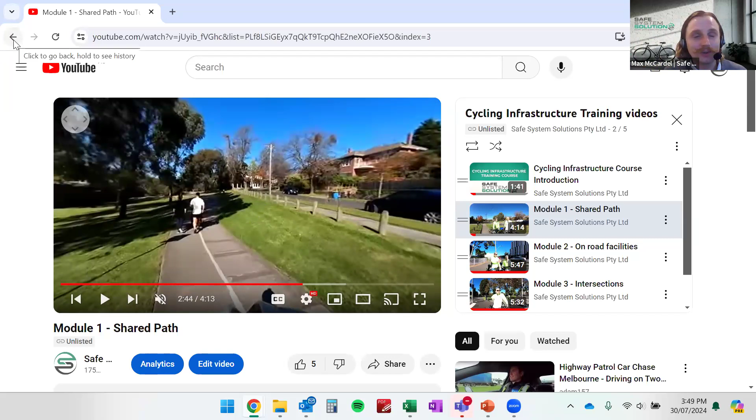So before our next session, we'll get you to watch this video. If you're watching on your phone, you can actually move your phone around—it's tied in with your sensors and things like that. It's pretty jazzy, give it a go, and we'll catch up on Thursday and have a chat around that video. Make sure you get that done before Thursday.

The other bit of work we'll get you to do is a quiz. Just click on the module 1 quiz, click attempt quiz, and there are 10 questions. We need 80%, so you need to get at least 8 of them right. If you're having any issues with those questions, or aren't sure why you're not getting 100%, drop us an email and we'll be happy to help.